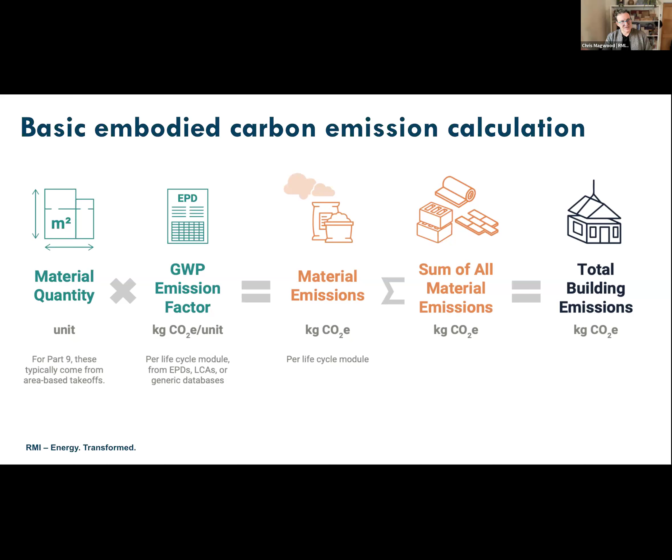GWP stands for global warming potential. The unit is kilograms of carbon dioxide equivalent. And so for every product that has an EPD, you know how much emissions is associated with a certain amount of that product. So to do a study like this, we have to figure out the material quantity of every product that we're going to look at, multiply it by that emissions factor for the product. Then you get the emissions associated with the product. And then you do that for all the products, sum them all together, and you get total emissions for the building. So when we start talking about the totals that we see from this study, this is kind of the math that's behind all of that.

And then why should we care about this topic? We should care because the emissions from making building products, in this case just for new homes and just in the United States, is really big. So, based on studies previous to this one, we've estimated that there is about 63 pounds of carbon dioxide equivalent per square foot of new home construction. Typically, over the last bunch of years, about 1.8 billion square feet of low-rise residential new homes have been built in the US, and that means somewhere around 53 million metric tons of emissions are associated with making the building materials for new home construction in the US.

And to put that in context, that little box on the bottom right shows you that that's somewhere in the range of the emissions from entire countries like Austria, Greece, Hungary, and Norway. So just the residential building products industry, just for the US and just for low-rise residential construction, has the same impact on the climate as entire countries. And so that's why we care about this, and that's why we think that the insights from this study are so important. Also, because those emissions are released at the beginning of a project, and they're the ones that we need to reduce within a meaningful time frame, within the next decade. So we cannot ignore those emissions and only look at energy efficiency.

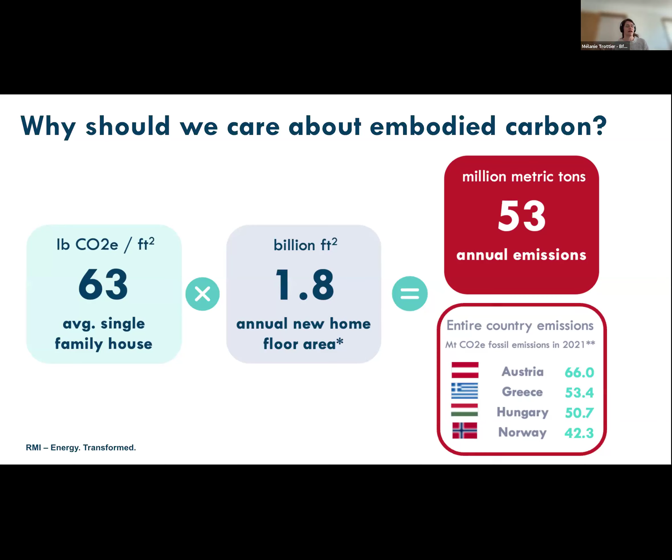Okay, so I'm going to give you just a quick intro to the 100 home study itself. That'll be this next little section. And I'll just kick this off by saying, we're really excited that this project happened in Massachusetts, and it owes a huge debt to the team at NEHERS, the Northeast Home Energy Rating System Alliance, who not only were the driving force behind this study, but they were also the driving force in linking me and my work at RMI with the RESNET organization.

And together with RESNET, we have created a standard for measuring embodied carbon in new homes. It's exciting. It's about to be published sometime in the next couple months. But this study was able to use the draft version of this RESNET 1550 standard to underpin the methodology of the study. So it's not only a unique study on its own, but it's a really great first use case for this new standard that's going to be coming in early 2026. And I'll hand it over to Mélanie to talk more about the study.

Yeah, there were three big funders of that study that granted the Northeast Home Energy Rating System Alliance, the NEHERS, to integrate HERS rating software for new homes with the Building Emissions Accounting for Materials, the BEAM tool that Builders for Climate Action developed. So the grant supported a partnership between NEHERS, Stephens and Company, Ekotrope, Builders for Climate Action, and NMR Group to train participating HERS raters and document the upfront embodied carbon emissions for 100 new Massachusetts homes.

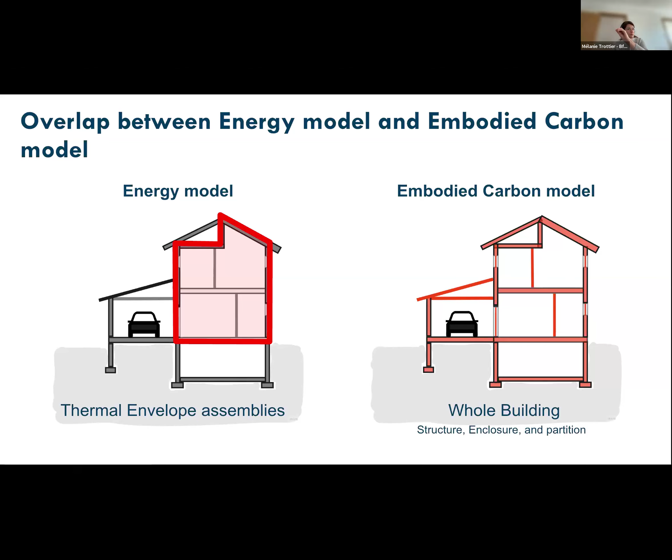We saw the life cycle stages earlier. So in this study, we looked at A1 to A3 for the embodied carbon. And since we're using homes that already have energy modeling, we were also able to look at the operational carbon emissions. And we looked at it over 25 years. So operational carbon emissions happen every year, right? It's a factor of how much energy you use and which kind of energy you use. So we looked at it for 25 years.

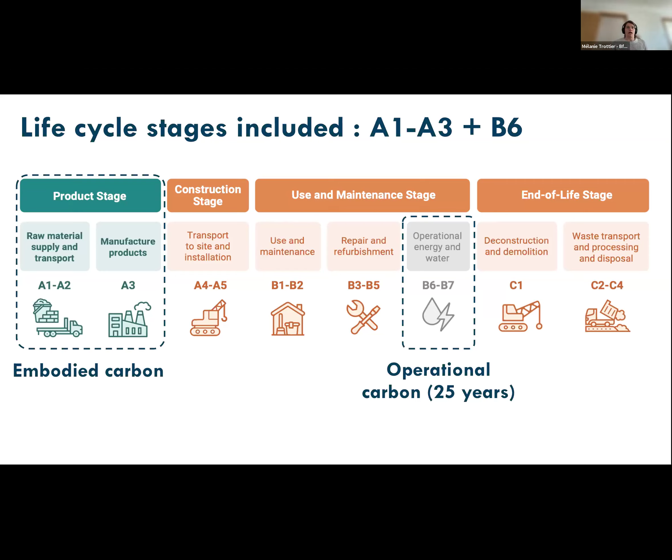And what was included in the embodied carbon assessment was most of the building, so footing and slab, foundation wall, exterior wall, party wall, exterior cladding, windows, ceiling, roof, structural elements, interior wall, and garage. And the uniqueness of this study was the first time we looked at mechanical, electrical, and plumbing systems, so MEP systems. And that is because of all the work that they did with the 1550 standard that provided a baseline to do this work.

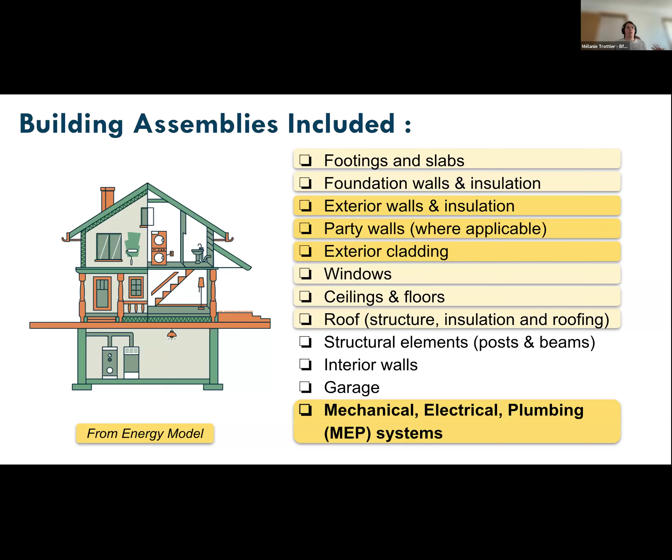And what we realized is there's already a lot of information that we were able to extract from the energy model. Some of it we could extract partially, and some are just not part of any energy modeling because it's not part of the thermal envelope, right? So the basic workflow of that study, we had those 13 raters selecting 100 registered projects.

So they had the Ekotrope energy model, where we had the thermal envelope material and also the MEP information, and then the drawing set or SketchUp. And then we developed a BETA integration worksheet. Since we're working with two legacy tools, Ekotrope and BEAM, they were not talking to each other directly. So we had to develop an intermediate tool to be able to transfer data to the other one.

And in that BETA integration sheet, we were able to import the material information from Ekotrope, so dimension and type of material. But since it's not all in this energy model, we also needed the rater to go back in the drawings and then have some manual input for missing information. So that's where the magic was happening in that BETA integration worksheet.

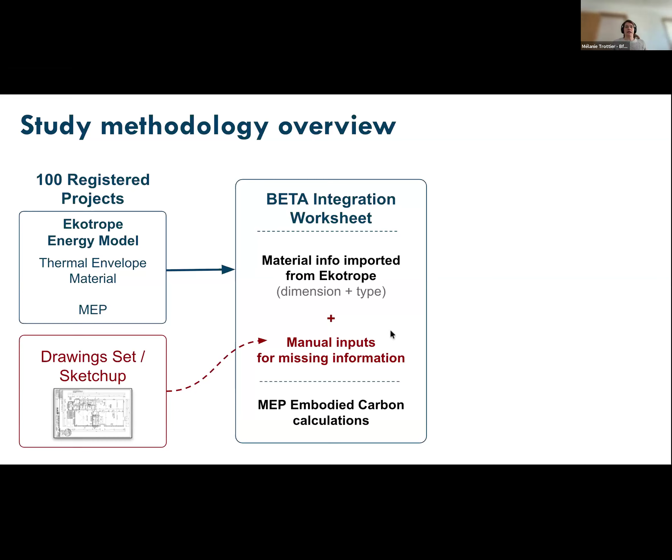This is also where we were calculating the MEP embodied carbon because it's not currently in the BEAM tool. So we developed a sheet specifically for that in that integration sheet. So raters were completing that and then manually integrating the information into the BEAM model.

Eventually, that whole workflow would be more automated and reduce the time. But within the time frame that we had for the study, that's what we were able to achieve, and it gave us so much great insight for future development on how to speed up that workflow and what we need to do. So that is the basic methodology.

So then we had those 13 raters. We trained them on this new workflow. They were completing all of the BEAM models and BEAM worksheets for all of their 100 projects. And then the research team QA'd every single one of them to make sure that the data was accurate, and provided feedback to the raters to help them create their models faster. So there was a lot of back and forth between them. So yeah, that's the study in a nutshell.

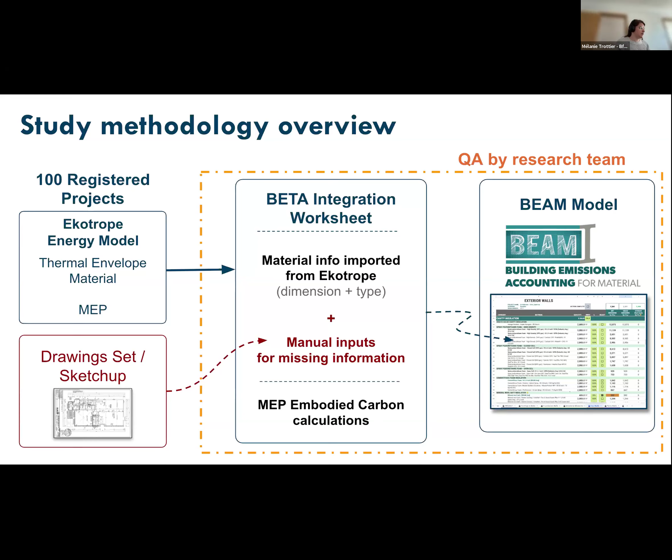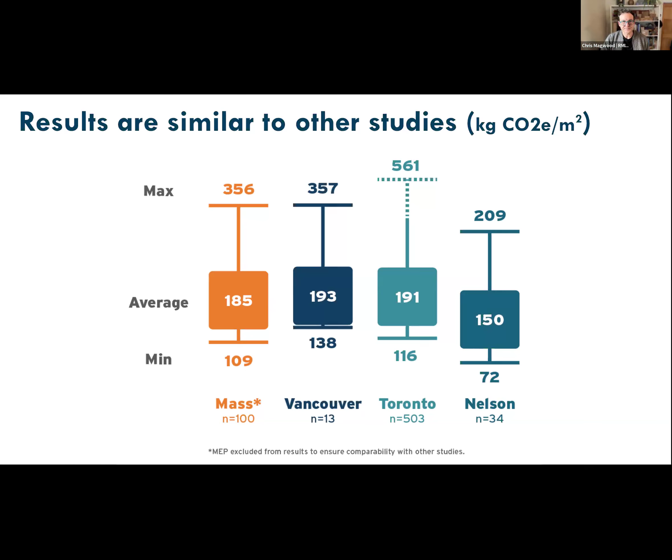All right, now we're gonna look at those results, but per material categories. So we found that actually MEP is a major contributor. So if we look at the gross material emission by category, we see that actually 76% is from only 4 categories. So concrete is always the biggest contributor to embodied carbon emission. So that is a low-hanging fruit to look at. And then we have MEP that wasn't looked at before, but we found around 18% of the upfront carbon. And then we have insulation and cladding. And that really matched with what we found in our other studies, but now adding MEP as the fourth biggest contributor.

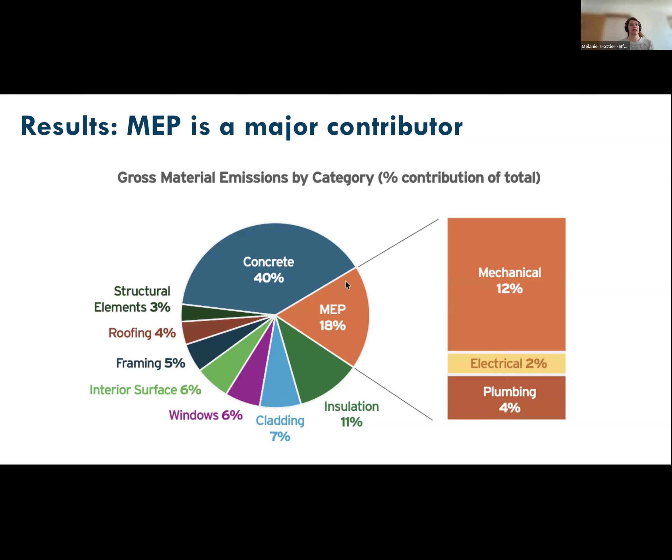When we look at MEP, we found that the mechanical or HVAC, so the heating, ventilation, and air conditioning system, are the largest contributor to MEP embodied carbon. We see here we have the mechanical results and then electrical and plumbing. And that is interesting because there's probably a lot more options in the mechanical to choose between different systems than electrical or plumbing. So doing more research to find what influences this will be one of the next steps to understand how we can and if we can reduce those emissions.

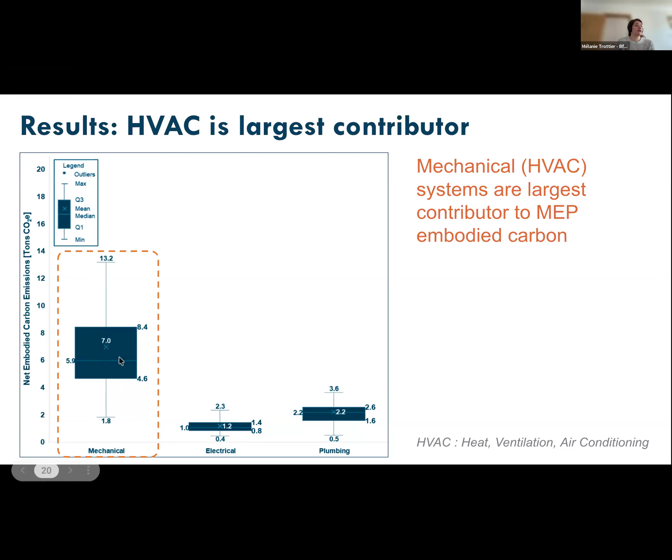Now, if we look at other bigger contributors, concrete is the biggest one. There's a lot of ways to reduce your concrete by using less, but one way is to change your mix. So the study assumes standard mixes, but depending on your strength or the supplementary cementitious material, SCM, that you can add in your concrete mixes, you can reduce your emission by 36 or 38%. So there are ways to reduce this that are fairly simple.

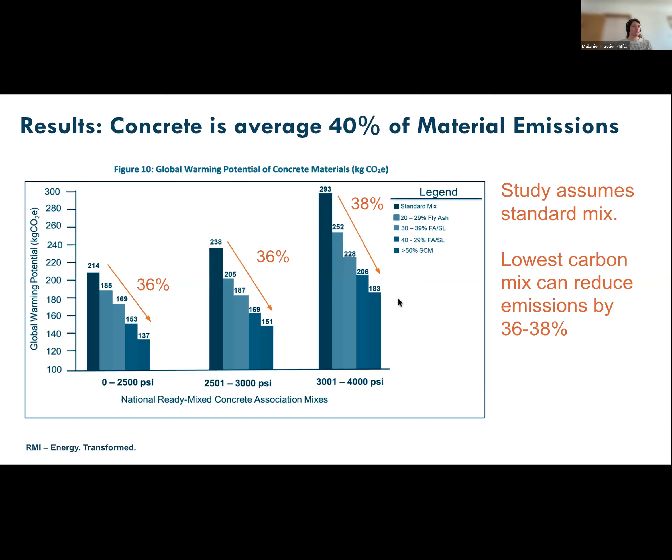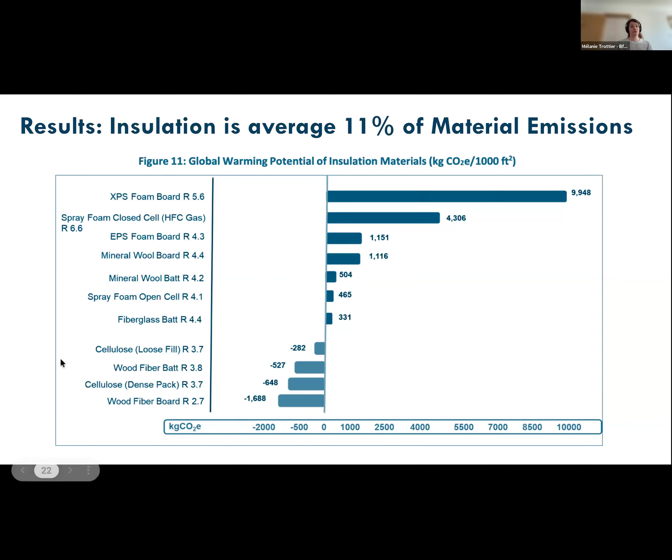And then if we look at insulation, it was around 11% of the material carbon emission. And that is a really interesting category because there's so many options that you can choose from to actually reduce your emission. And a tool like BEAM can really help you make better decisions on those materials that will reduce overall your emission. And then cladding was another category that also has a lot of options that you can choose from to reduce your emission.

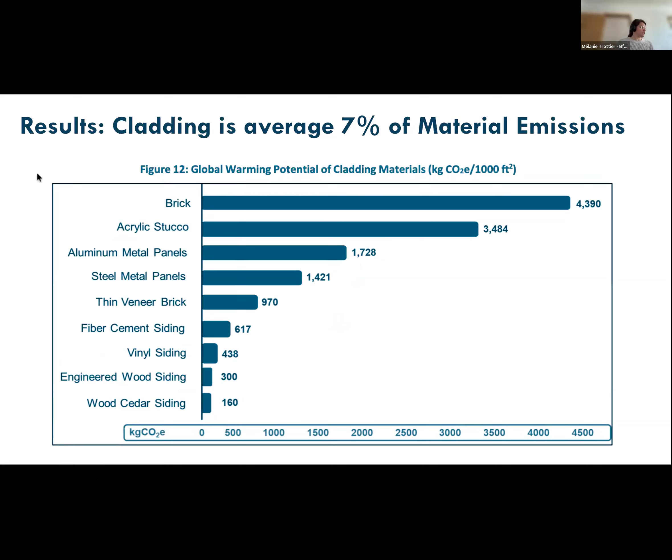So from there, we're going to look at a really interesting part, the embodied plus operational carbon results. To you, Chris. Yeah, thanks. And this is where this study was interesting for sure for all the other things that we've looked at, but it's particularly interesting because we have these HERS models for all of these homes. We're able to sort of put embodied and operational emissions results together really easily, and so there are some great takeaways from this. Can forward me.

So I think that for me, the main takeaway here is that what this study points to is that the level of energy efficiency achieved by a new home is not a predictor of its embodied carbon performance.

I think in the time that embodied carbon has emerged as an issue, there's been a tendency to frame it as, well, if you're trying to make a building more energy efficient, you're probably going to raise the embodied carbon, particularly from using more insulation or, say, triple pane windows. There's this notion that you can't raise the energy efficiency without also raising the embodied carbon, and vice versa. If you're really trying to reduce the embodied carbon, you're likely to reduce the energy efficiency. And what this study pointed out is that there's absolutely no basis for that.

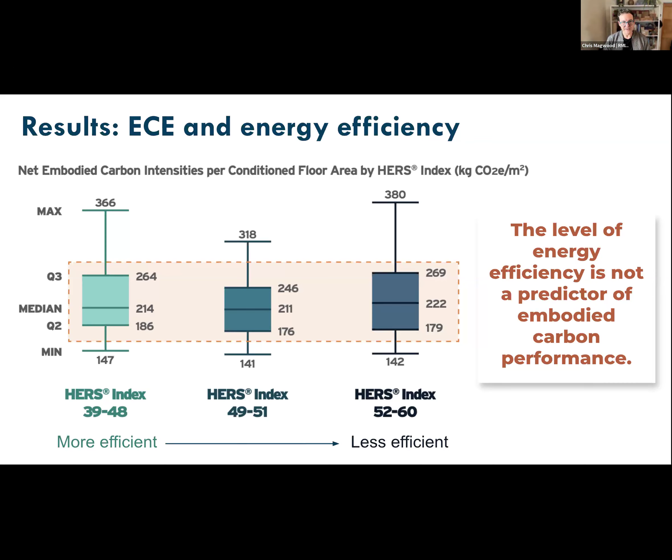And so I think that's a great indicator that this dichotomy does not truly exist. You can obviously make more energy efficient homes over here on the left and at least not raise the embodied carbon. You can at least do it by keeping it in the same range. And interestingly, even some of the outliers were similar across these three categories. So to me, this was a really important takeaway that we don't have to think of operational carbon and embodied carbon as an either-or kind of predicament. We can address one without necessarily affecting the other. Or we can address both. Exactly.

One of the other interesting takeaways is that the HERS raters had looked at operational emissions over a 25-year window, and this is using the averages across the whole study. The average embodied emissions were just under 56 tons. The average operational emissions were 118 tons, and what that means is that it takes, on average, in Massachusetts, about 12 years before the operational emissions from new homes reach the level that the embodied emissions reach. So it's a great demonstration of how important it is to address embodied emissions because, for at least the first decade, and for some houses as many as 3 to 4 decades, the emissions profile is dominated by embodied emissions.

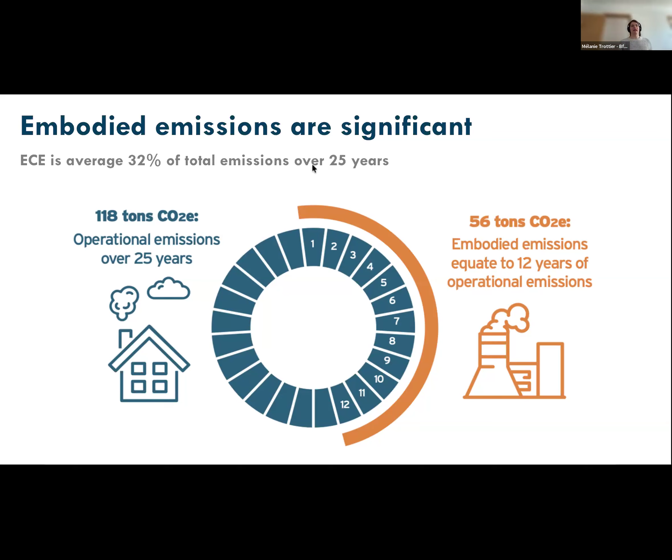And as Mélanie pointed out earlier on, all of those emissions go into the atmosphere basically before the building is occupied. That means they're in the atmosphere and driving warming consistently from that point forward. And so seeing that they make up over 30% of the 25-year emissions pie just really stresses how important it is to look at this and start reducing these. Yeah, and 25 years puts us a little bit over 2050, and according to research we need to reduce our emissions to zero by 2050. So we need to look at those emissions. We cannot just look at operational carbon emissions.

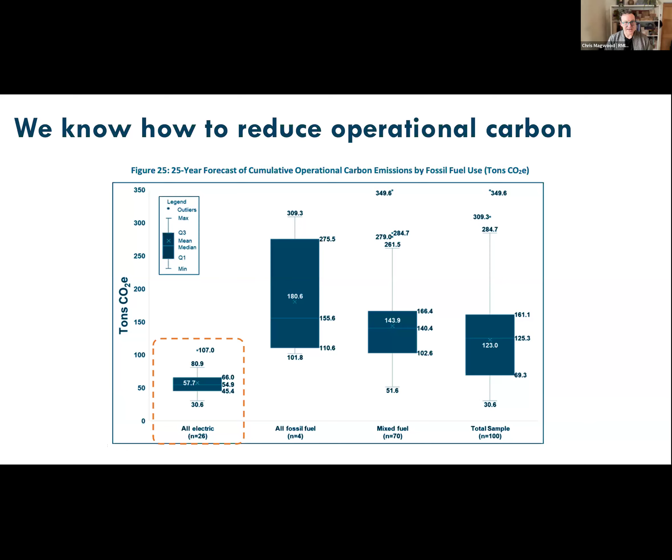Yeah, and so this slide is no surprise. This wasn't a great revelation in this study. The all-electric homes in this study, you can see in the little orange box on the left, by far had the lowest operating emissions. And this is nothing new. We've known for a long time that energy efficiency and cleaner energy powering buildings are the two ways that you drive down operational emissions. No great revelation or shock there, but confirmation that's the case. And then on the next slide,

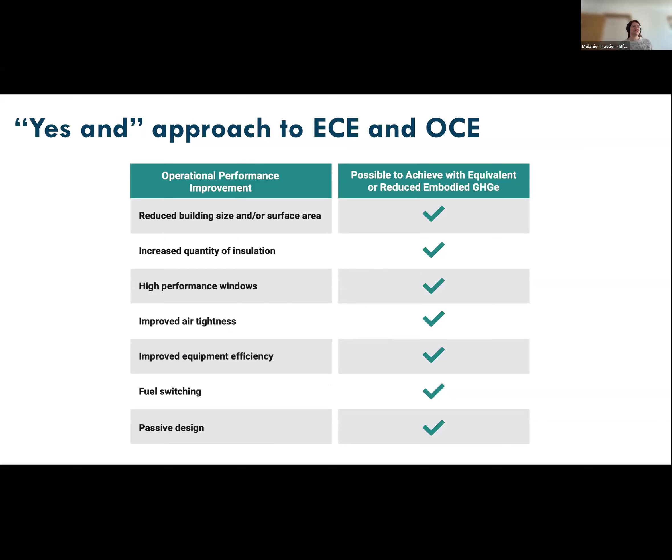And I just want to add, this is not rocket science. People are doing it right now. So there's no reason why we cannot do it. It's just about choosing the right material and having the right design, right?

All right, now to the last part, the HERS raters and embodied carbon. As I mentioned, this was the first time we trained raters during a study, and I'm sure some of you are in the crowd today, and I want to give a big shout out to you. You did amazing.

So we saw that HERS raters are super well positioned to support embodied carbon assessment with modest additional effort. On average, the raters reduced their completion time of embodied carbon assessment from 3.5 hours to 2.7 hours. So a 23% decrease after completing 5 to 10 projects. And that was within, I think, 3 months of work. So that's really good.

And also, as we develop the tool, that time would be reduced even more when the data import to BEAM is automated. So we already have good results, and we see that there's good potential there.

What we learned while training those raters is that there are some gaps in their understanding. 55% identified that it was hard for them to identify specific products or materials from the drawings, the ones they're not used to identifying, or to have standardized guidance on the level of detail needed to do their takeoff.

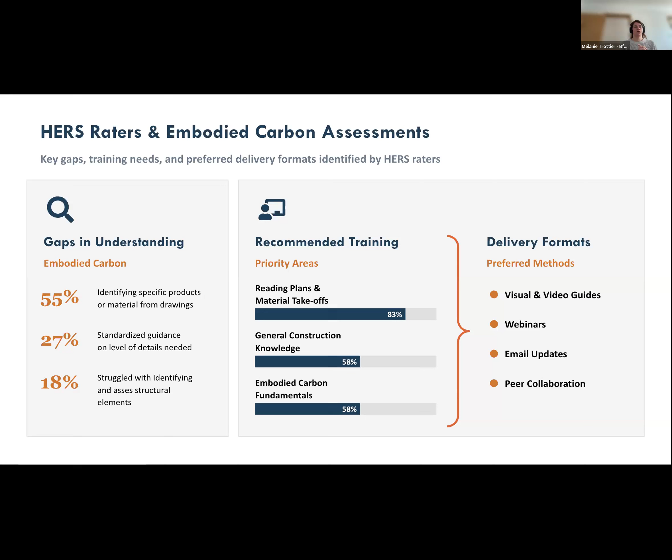reduce their embodied carbon? So some delivery formats that they liked were visual and video guides, which we provided a lot. We did some webinars and email updates and peer collaboration. There was someone on call for them to meet to help them do it. So that's our learning.

So to wrap up this study, what we found is that the study demonstrates that embodied carbon analysis can be combined with typical operational energy assessment, and the study illustrates that scalable and practical pathways to more holistic carbon accounting in residential construction are possible. So we now have everything that we need for market transformation. We have a standard that can ensure fair and inclusive implementation that will be published. We also have innovation through new tool development to integrate a better workflow and be more efficient.

And we also have workforce development started through that study to test the workflow. And the great thing with that study is, yes, it provides region-specific data and supports workforce development, but it can be replicated quite easily for other regions in the States. They can do the same thing and also help their market transformation through that study. And then I think, Chris, you also wanted to add on that piece. I think you're already looking at developing more training for raters.

Yeah. So under workforce development, as the RESNET 1550 standard gets published this spring, we're also already underway in developing a pilot training program. So more information coming on that soon. But I really like the framing here that this study sort of shows all of these things are in their early days. The standard is just about to come out. A new version of BEAM that integrates with Ekotrope is about to come out, and this pilot training program for 1550 is about to come out.

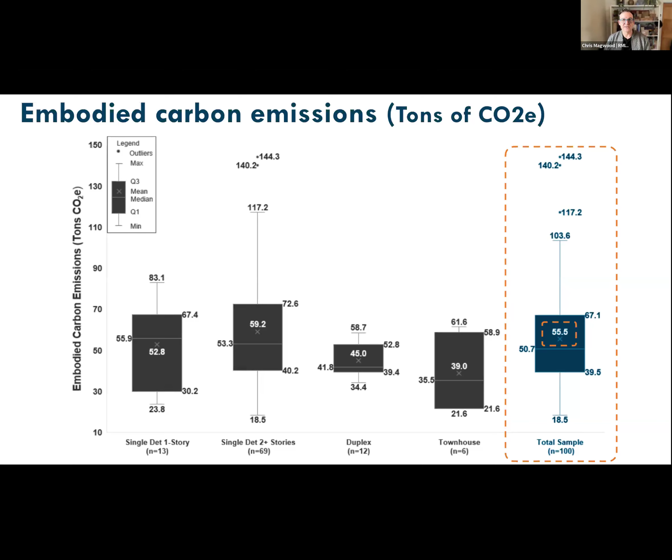You've chosen a lot of really high emitting products, or you've chosen a lot of really low ones, but in both cases, specifically for the intensity, it is those product choices that make the difference. So that's kind of at the heart of it.

Thank you. Scott, do you still have a question, or is your hand still up? Yeah, it's still up. Okay, I unplugged my speaker.

So you had the slide with the highest intensity embodied carbon and energy usage, and the slide with the lowest intensity embodied carbon and usage. My question is, did you take out those houses that were trying to get PHIUS certified? Not all of them get certified, and a lot of them have to get HERS rated to get building occupancy, because the PHIUS certification comes a year later. PHIUS has both an embodied carbon and an operational part of being certified.

Those builders are inclined to do this, and I think that might be skewing your recommendations, because I know in Massachusetts most people insulate with one of the spray foams no matter what, whether they're doing retrofits or anything else. And obviously that's something you want to eliminate, because that's one of your highest embodied carbon products.

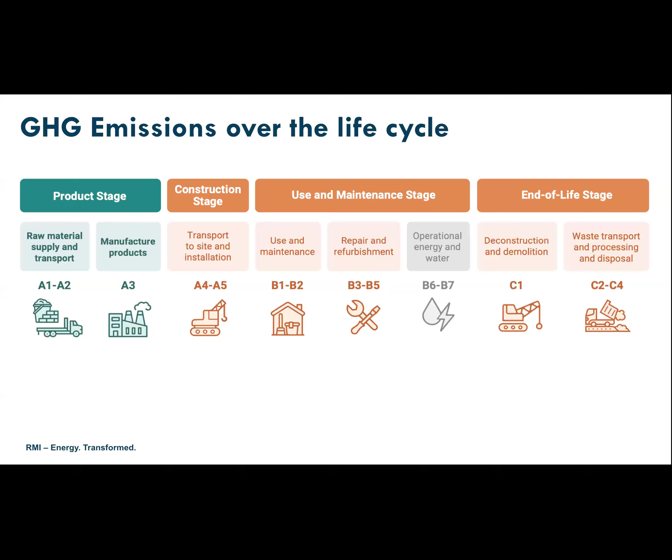But I wondered, Chris, if you could speak to the life cycle of some of these products, because over time, different building components will have to be replaced. As we get into that, that may change the way we look at embodied carbon, because some building materials may have a longer longevity. I think where we are is where we absolutely have to start from an adoption perspective, but I don't want us to lose sight that life cycle will play a factor, especially with things we have to replace more.

Yeah, I totally agree. When we look at the whole life cycle of a building, the product stage emissions are the ones we focused on here. There are two reasons we focus here. One is this is where we have really good data. Each product has its own EPD, or a group of products will be under the same EPD, but we have really good data representation on that product stage.

And also, when you do look at the whole life cycle of a particular product, the product stage typically really dominates, like, anywhere from 65 to 85% of a product's whole life cycle emissions happen in the product stage. So that's the reason we're focusing here.

I 100% agree with you. I think it is really important to think across the whole life cycle. Some of the reasons we don't do that now is we just don't have the data to support good analysis moving forward, and that's especially tricky in the residential sector. In the commercial sector, there are at least some rules of thumb. I still question how accurate they are, but for things like transportation and installation and especially use and maintenance, because commercial buildings tend to have plans, right?